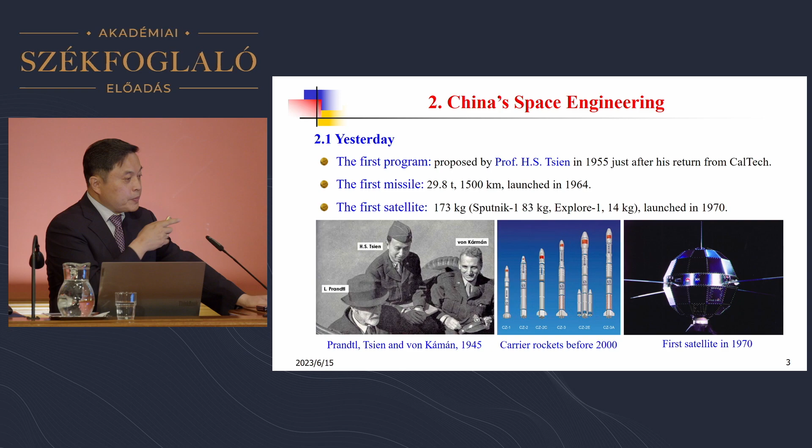By the end of World War II, Professor von Karman led a military mission to Germany to investigate the research on aeronautics and astronautics on the German side. This mission included only 5 people, including von Karman, and Professor Tsien was one of the members. This picture is very valuable—it shows Professor von Karman on the right, Professor Tsien in the middle, and on the left Professor Ludwig Prandtl, the supervisor of Professor von Karman.

They had this meeting in Göttingen just at the end of World War II. However, ten years later, Professor Tsien returned to China and proposed the first program to the State Council to develop long-range rockets and missiles. This was the very beginning of China's space engineering.

China launched its first missile in 1964. From today's standard, this was just a middle-range missile, because the maximum range was about 1,000 to 1,500 kilometers.

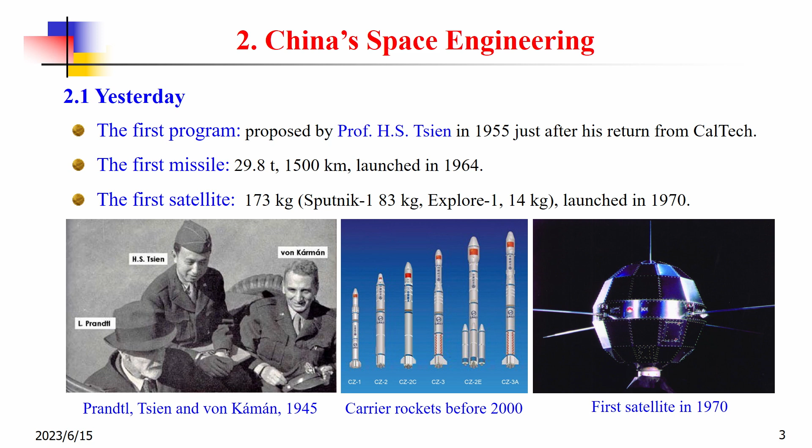Then China launched its first satellite in 1970, based upon the development of those missiles. I need to emphasize that the total weight of the first China satellite was much heavier than that of Sputnik, launched by the former Soviet Union, and Explorer 1, launched by the USA. This represents the capacity and ability of carrier rockets in the old days.

Now let me turn to today. As you know, China has established the China Space Station, and this station accommodates 6 astronauts in total. Very recently, last month, crew number 15 completed their mission and returned to Beijing, and crew 16 began to work.

In the past few years, China has completed several lunar explorations. The most important was CE4, completed in 2019. It landed on the far side of the moon, and the next mission sampled about 1.7 kilograms of lunar soil and returned it to Earth. These are very important missions in the new century.

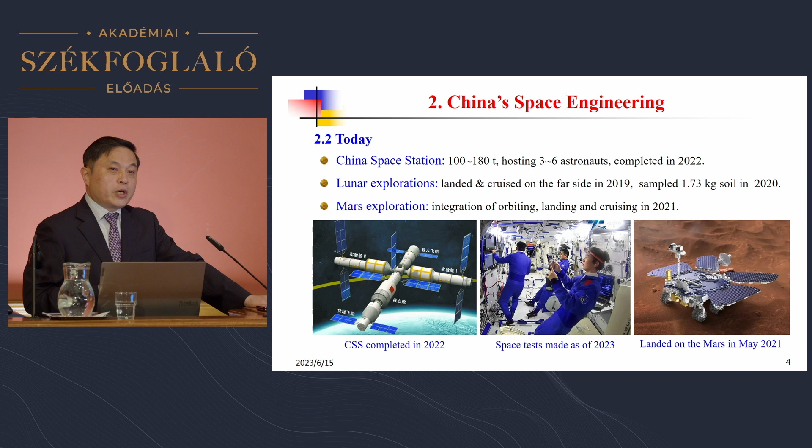In addition, China completed its first Mars exploration 2 years ago. This mission is very complicated because it integrates orbiting, landing, and cruising on the surface together. This was also China's first mission to Mars, so you can imagine China did not have a lot of information about the Mars surface. We needed to detect the surface of Mars and decide the best location for landing.

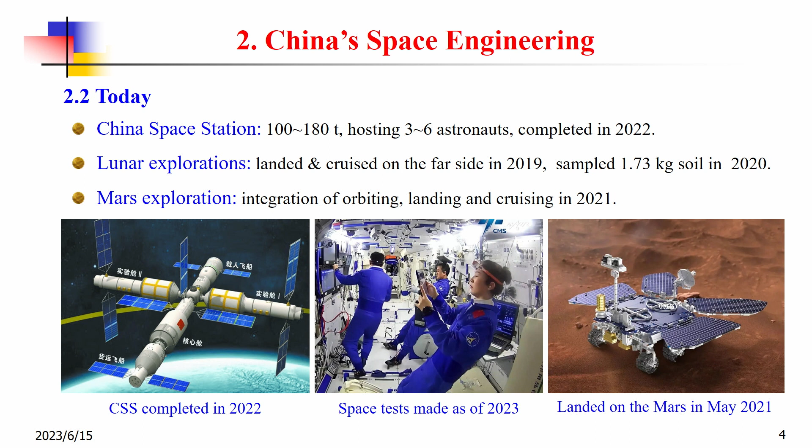Now I'm going to select 2 examples to detail some technologies. Let me talk about CE4. CE4 means the 4th mission of the Chang'e program. Chang'e is the name of a beautiful lady in Chinese myths.

That's a legend. It's said that this lady swallowed the magic medicine of her husband, and then she flew to the moon automatically. She didn't know how to do it and could not come back. Anyway, she lived on the moon, so China used the name Chang'e to call the lunar exploration.

CE4 is the 4th mission to let the orbiter and the landing platform go to the far side of the moon. What does far side mean? Perhaps you know the spinning rotation and the rotation of the moon around the Earth are the same, so we can never see the other side of the moon.

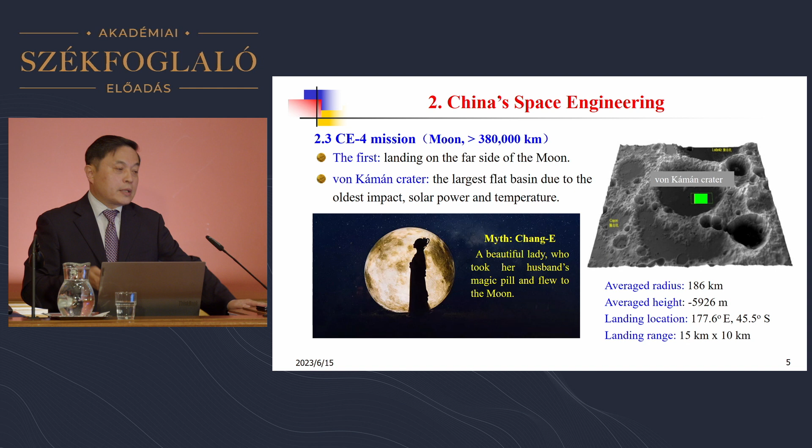So you can imagine the difficulty here: how we can communicate and control a satellite and then send the landing platform to the far side of the moon, because it's not possible for us to see it directly, and not possible for us to communicate and control it directly.

The other issue a lot of people ask me is why the landing platform finally chose Von Karman's crater. Crater here is a very specific term, meaning a basin due to impact. Let me talk about this story later.

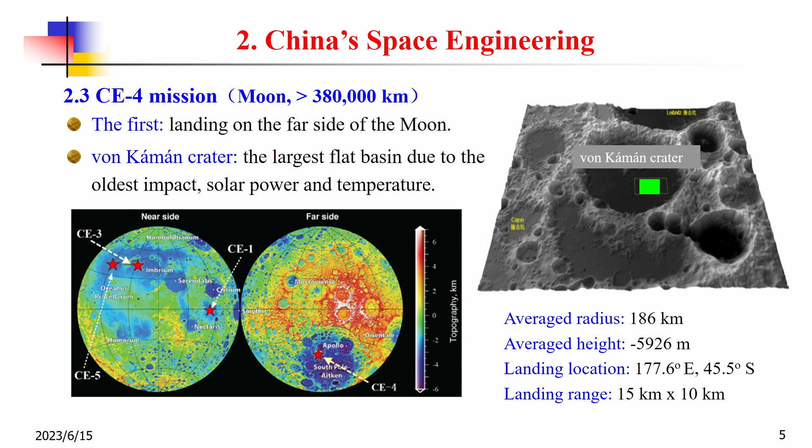This picture shows you several locations: CE1, CE4, and CE5, etc. The CE4 location is in the right picture. This means the far side of the moon, and the blue region in the bottom part means the South Pole region, called Aitken.

This is due to the impact of some asteroid, a small planet. Astronomy scientists told me that this is the oldest impact in the solar system.

Here today, some people are more familiar with these stories. Anyway, this is a very important location from a scientific value standpoint, because if we can collect some soils or rocks later on, we can judge or identify the source of the solar system.

So China selected Von Karman crater simply because it is the oldest and most flat basin on the far side. Meanwhile, it can offer enough solar sunshine to guarantee our solar power systems and keep proper temperatures for the landing system and rover.

The right picture shows you the exact location of the landing position. The green square in the picture is 15 kilometers wide and 10 kilometers high. We needed to control the landing platform to fall within this very exact rectangle.

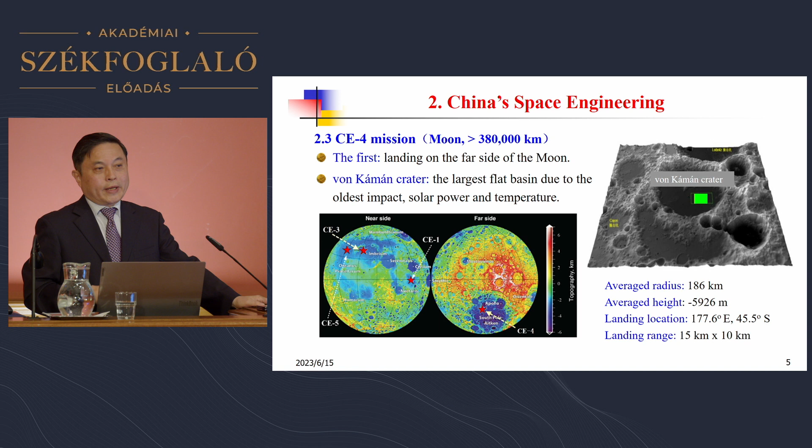This is a very tough problem because we cannot communicate with either the orbiter, the platform, or the rover. So the simple idea to complete communication and control is to launch a relay satellite to the far side of the moon, just like the picture shows.

Actually, we launched a relay satellite to the so-called halo orbit around the second Lagrange point, along the connection between the moon and the Earth. More than several hundred years ago, the French mathematician Lagrange found 3 points along a line passing through the Earth and the moon.

Here is the second Lagrange point; the other points are here and there. We can use this point because around it, the centrifugal force of your spacecraft and the summation of all gravitational forces are balanced. So usually we say it's quite clear in those regions.

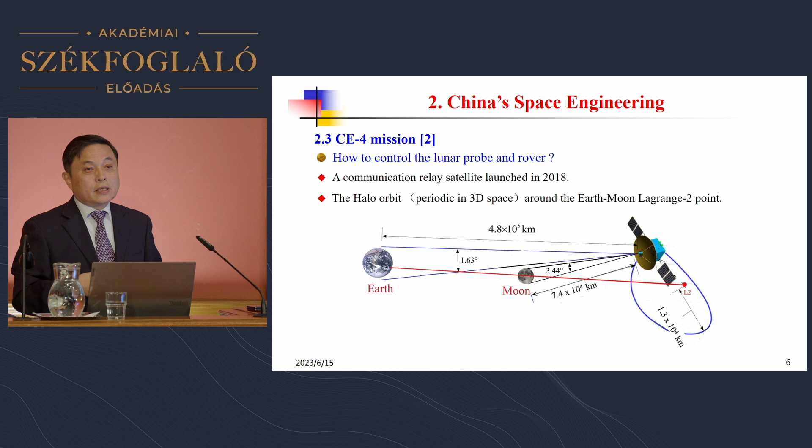In humankind's history, this was the first time for us to send a relay satellite so far, together with a very large antenna. Because if the size of your antenna is small, then the signal you can receive and transmit is too weak, and that would be useless.

So the most important issue for this mission is to design and manufacture a very large antenna in a very exact configuration. The final antenna the Chinese engineers designed has 4.2 meters in diameter. In addition, it needs to transmit X-band signals, about 8 to 12 gigahertz, so the wavelength is very short.

However, the configuration of your antenna reflector must be even smaller than the wavelength. So the basic requirement is that the mean square value should be less than 1 millimeter, which is about 0.83 millimeter. If you make a simple calculation, you can see that D divided by E is about 5,000. This is a very strict requirement for the design of a space antenna.

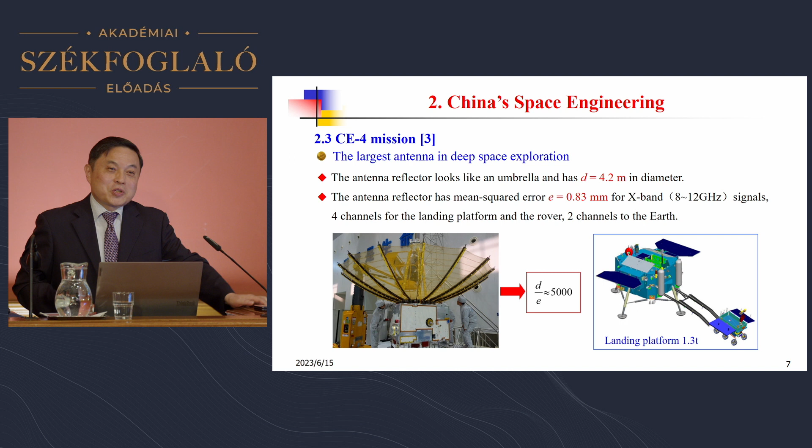Anyway, we did it. The left picture shows you the antenna in the final ground test, and I was involved in a lot of evaluations for this antenna. We need to guarantee that the exact shape we measured on the ground, with the impact of gravity, cannot influence the real shape when it is centered near the moon's orbit. This includes a lot of mechanical problems, mechanics, in particular dynamics.

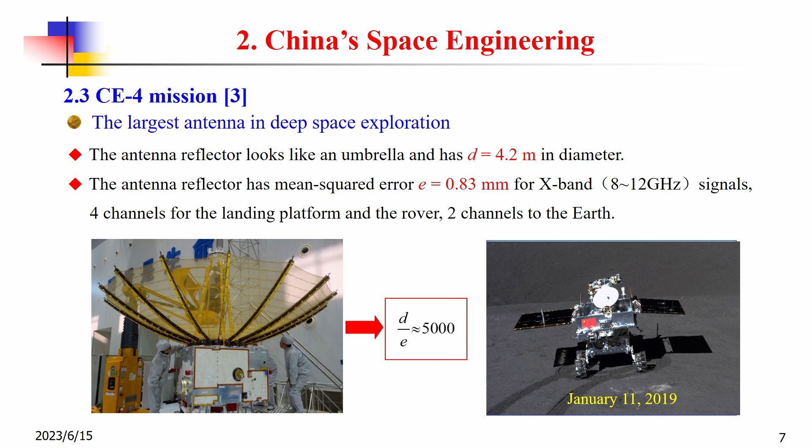And the right picture shows you the landing platform together with the rover. And finally, on January 11, 2019, we succeeded. This picture shows you the rover landed on the far side of the moon. Okay, this is the first example.

The second example I'm going to talk about is the TW1 mission to Mars. This is China's first mission to Mars. As I just mentioned, we tried to integrate orbiting, landing, and cruising together in a single mission. This is very challenging. In China, we use Tianwen to name all the exploration programs to Mars.

Tianwen is the name of an ancient poem or poetry written by Qu Yuan. This poetry is about exploring universal laws or rules. Of course, that was about 2,000 years ago, and a lot of things were imaginary. However, today, a lot of things have been realized. Anyway, TW means the name of the Mars project in China, and TW1 is the first mission.

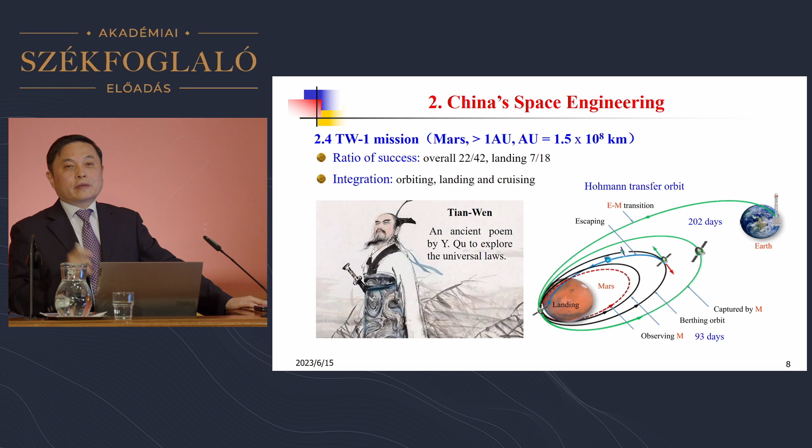As you know, Mars is much farther compared with the moon. We use AU to represent the distance between the sun and the Earth, and the distance between Mars and the Earth is beyond 1 AU.

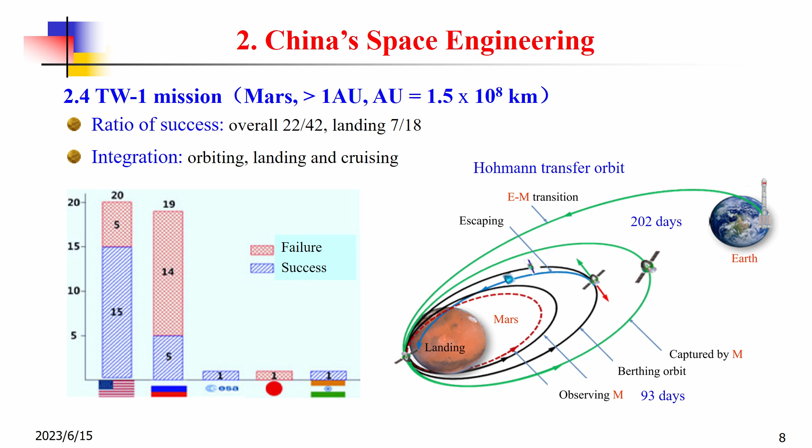So, among the history of humankind exploring deep space, the success ratio is very low, and here I can give you some figures. If you look at the overall missions, the success ratio is 22 out of 42, so about 50%. If you look at successful landings, only 7 times were successful compared with 18 attempted missions. By the way, all the successful landings were completed by NASA, based upon a lot of previous detections, including Mars information, Mars atmosphere, Mars gravity, etc.

Based upon this information, you can design your orbiter, your landing system, and your rover. However, for China, we did not have enough information, so you can imagine it's very hard for us to design the whole mission integrated with so many tasks.

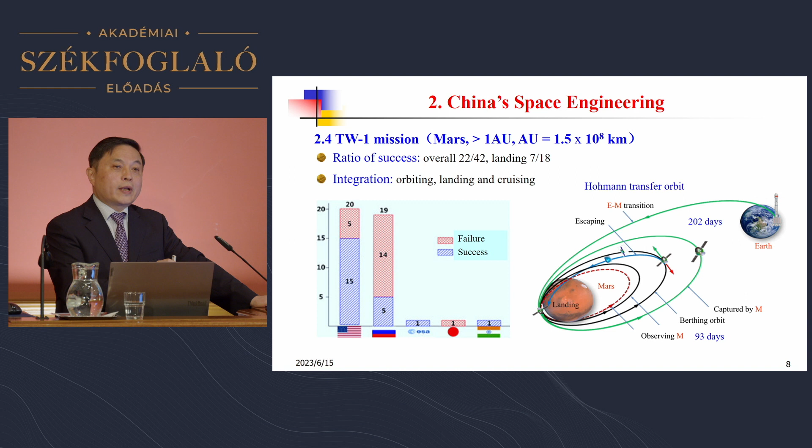The right picture shows you the whole mission of TW1. The probe was launched from the Earth and spent more than 200 days traveling from Earth orbit to Mars orbit. Then it spent 93 days observing Mars in detail, to select the proper location for landing, and to detect, for example, the density of the Mars atmosphere, then to determine a lot of landing parameters.

In this mission, the most tough problem is also related to mechanics, in particular dynamics. It's called EDL, the abbreviation of entry, descent, and landing. The question is how to drop off your capsule at Mach 8, very high speed, then how to utilize the Mars atmosphere to open your parachute at about Mach 2, also very high speed, and how to reduce the landing platform from Mach 2 down to a much lower speed, for example 3.6 meters per second.

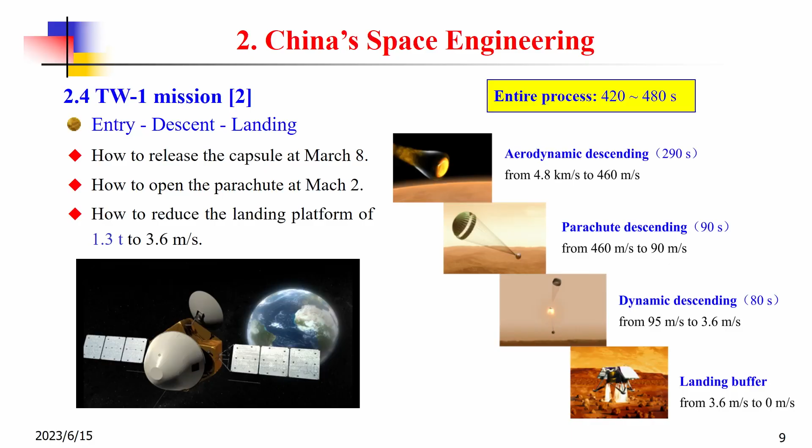We use 4 steps to complete this EDL process. At first, we spent about 300 seconds using aerodynamics to reduce the speed. Then we open the parachute, using 90 seconds to reduce the speed further. Then we start the engine to produce propulsion, and finally land on Mars.

To understand the EDL process, let me show you the detailed structure of the landing system. The landing probe is mounted on the orbiter, and the orbiter will drop off the landing platform, which includes the capsule to protect against the high temperature. Within that, we have the rover for detection and the platform together, and last, we have the bottom cover to conceal and compact all these things into the capsule.

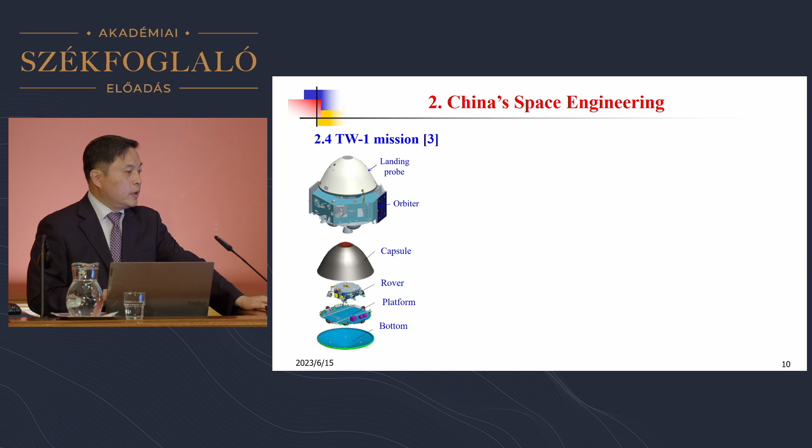Now let me show you some videos to demonstrate the whole process. The first step is to drop off your capsule or the landing probe. After it enters the atmosphere, you can see the effect of the interaction between the capsule and the rarefied gas. This is the first step.

Then we open the parachute at about Mach 2 and then drop off the bottom cover, letting the speed go down rapidly.

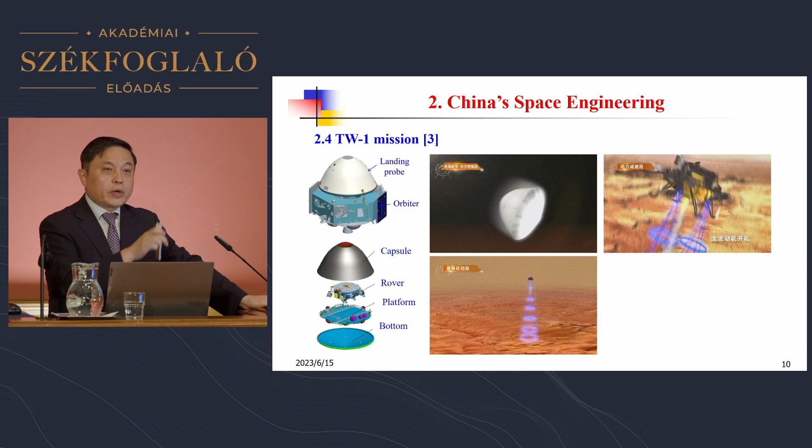Then in the third step, when the probe was at a height of about 100 meters, we open the laser detector to monitor the 3D surface or the Mars surface, then select the best location point. It will maneuver and move horizontally, not very large, about 200 meters in circle.

Finally, when the probe gets the proper information for landing, it will open the landing engine again and finally land on Mars. Okay, what is the mechanics?

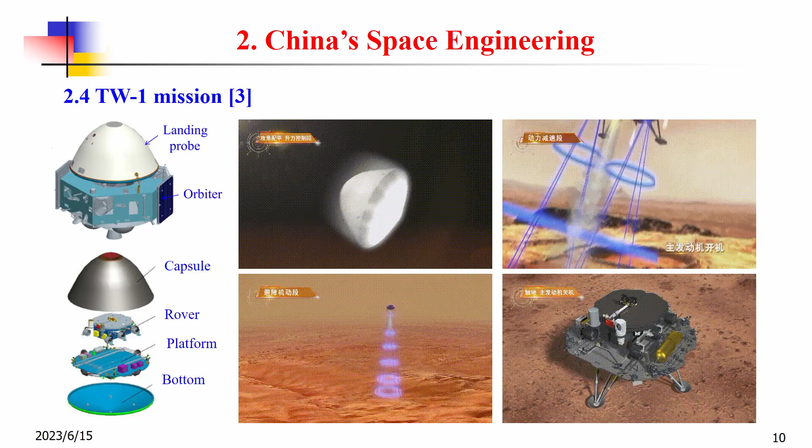I'm going to give you two examples, using two slides to demonstrate the importance of mechanics. The first thing is how to design the capsule.

We can get some information from previous Mars exploration, however, the shapes or configurations were not satisfactory. So we made a lot of CFD computation. For example, for rarefied gas dynamics over 30 kilometers above the Mars surface, we need to use direct Monte Carlo simulation for the transition flow, and then use a Navier-Stokes solver for the continuous flow. We found that the previous shape or configuration of the capsule was not good enough.

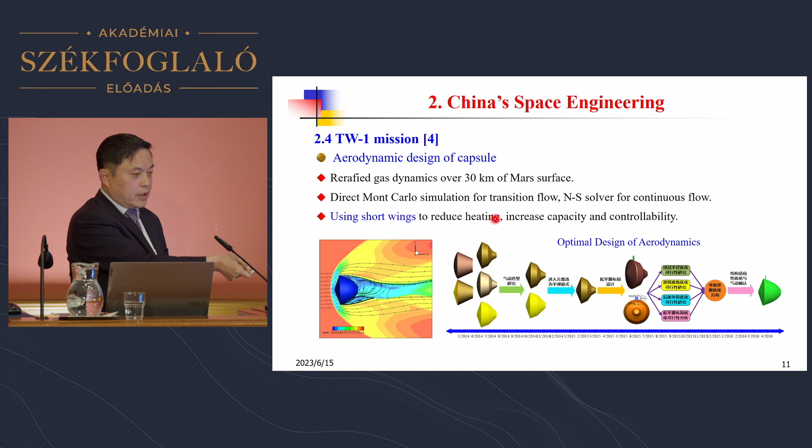We cannot reduce the speed properly, so Chinese engineers decided to use short wings to reduce heating, increase the volume of the capsule, and increase controllability. After a lot of iterations of optimal design, the final capsule configuration looks like the green one in the foremost right.

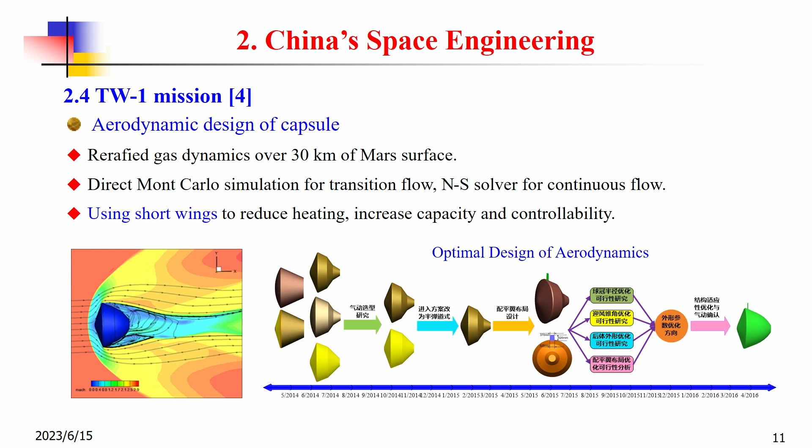Okay, this is the solid mechanics together with fluid mechanics. Then I will talk about the other problem, parachute dynamics.

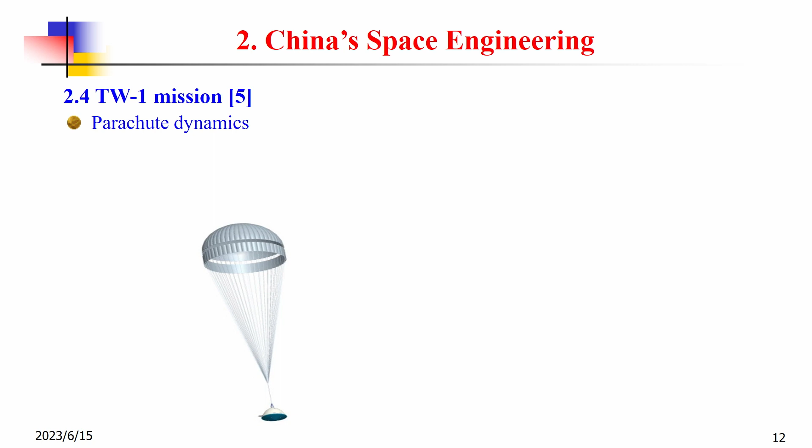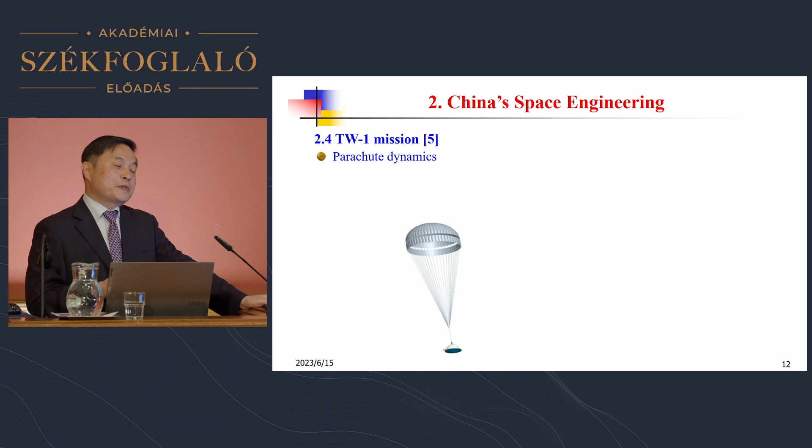Since Mars has atmosphere, it's quite natural for us to utilize the atmosphere to reduce the speed of the probe by means of the parachute. However, we have never experienced opening a parachute at Mach 2, also at very low gas density, because the density of Mars atmosphere is only about 1% compared with Earth's atmosphere.

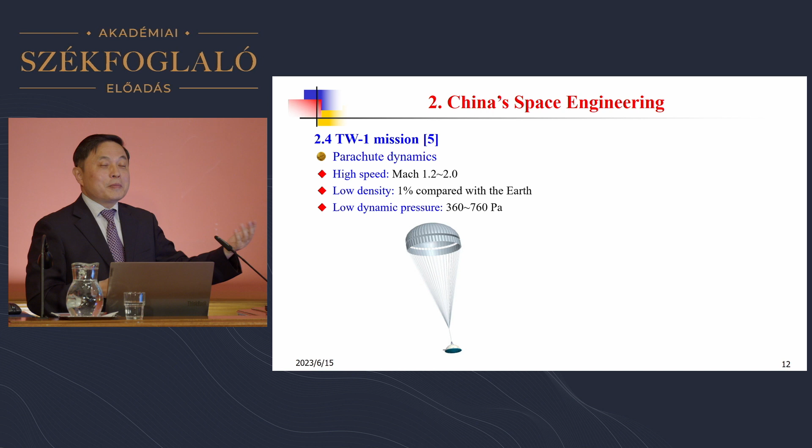So, of course, we did a lot of numerical simulations, and we found that the dynamic pressure is really very low, only around 360 Pa, compared with a similar process on the Earth.

Here is an example of numerical simulation, and you can see the two shock waves. The top one is near the parachute, and the bottom one is near the probe. Of course, no one believed the result because it was just a try.

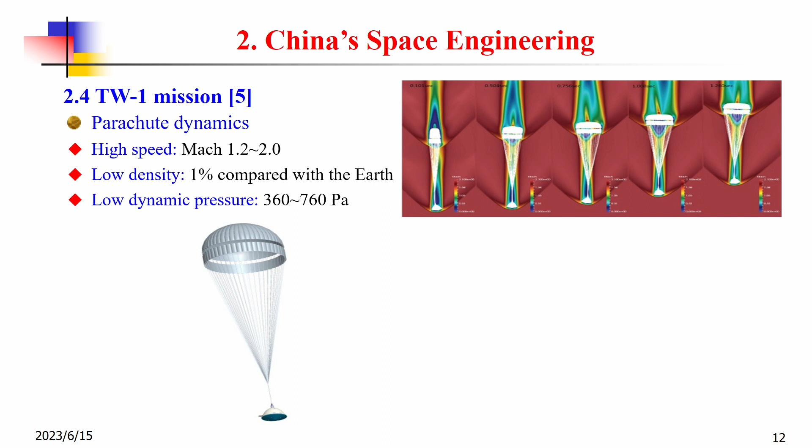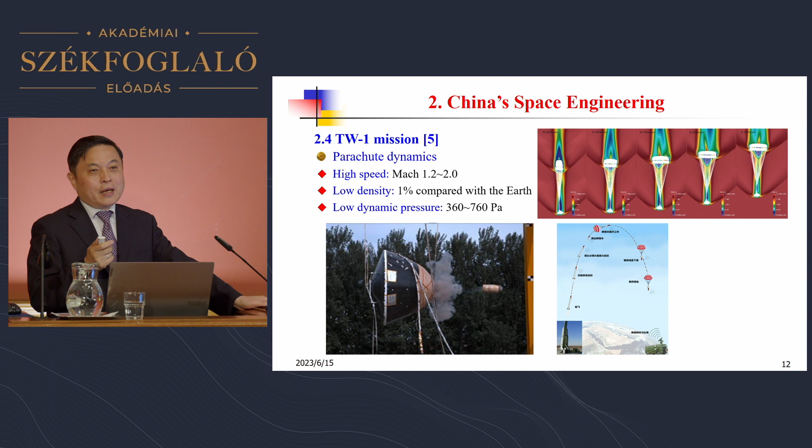So we needed to do some ground tests to verify the correctness and efficacy of the numerical simulation. Finally, we did 6 ground tests, very expensive ones, including the opening of the parachute shown in the left picture, and launching the parachute to very high sky at different speeds, approximating the real case in the Mars mission. Finally, we confirmed that the numerical simulation was okay, and then we could complete our Mars mission.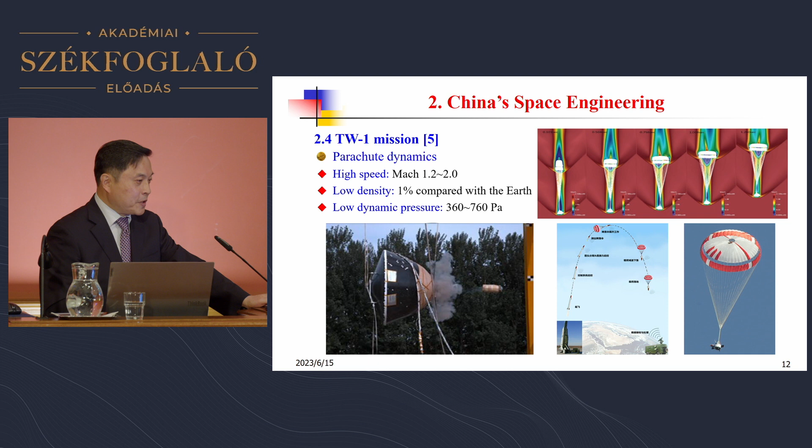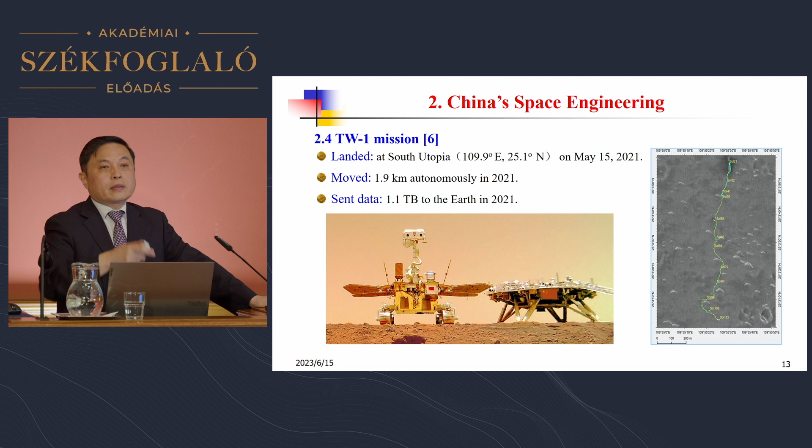We are lucky that about 2 years ago, on May 15th, 2021, the first Mars mission of China was fully successful. Later on, the rover moved about 2 kilometers away on the Mars surface within the first year. Then the platform and the rover together sent a lot of data, about 1.1 terabytes, to Earth. The right picture shows you the trajectory, the path of the rover on Mars.

Okay, this is the end of my second part. Now let me say a few words, in more detail, talking about my research related to those missions, in particular the demands for large space structures.

Nowadays, we have increasing demand for the size of space structures. As you know, solar panels are a mature technology, called conventional large space structures. The size of a solar panel can be, say, 10 meters or even 20 meters in diameter or length. The deployable structures I'm talking about today refer to space telescopes and space antennas, because they not only have large size but also very accurate configuration. That's very tough work. Nowadays, people are interested in even larger space structures.

We have some basic concept designs about the solar power station. It will have a size over 1 kilometer and even up to 10 kilometers. Here I show you some examples.

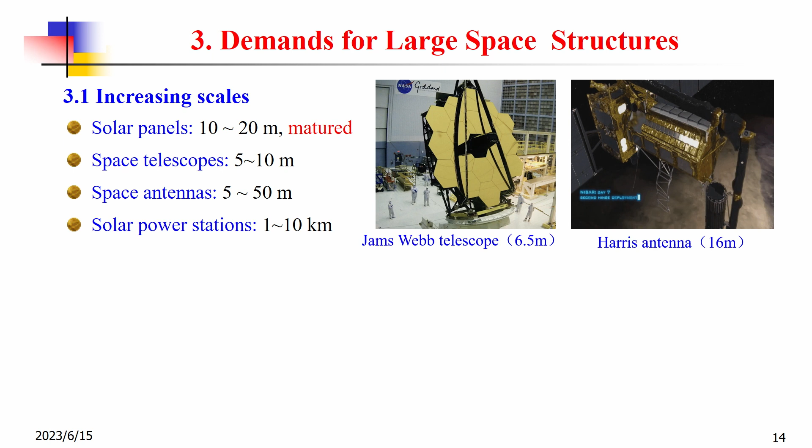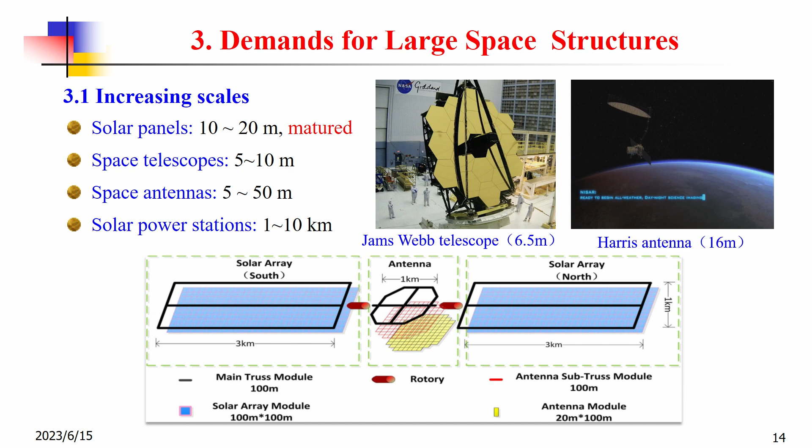This kind of antenna can be used for telecommunication and Earth observing, and also space observing. Regarding the solar power station, this picture shows the length is 7 kilometers and the width is 1 kilometer. So how do we get or construct those large space structures?

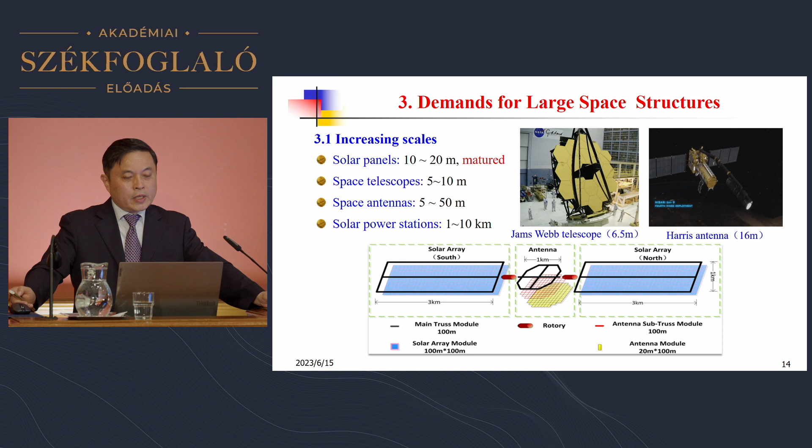This is a very challenging task for space engineers, and we need to deal with certain problems. The first is reliable deployment. The deployment process is very complicated. For example, the former Soviet Union and the United States failed multiple times, even for the deployment of a space structure less than 10 meters in size.

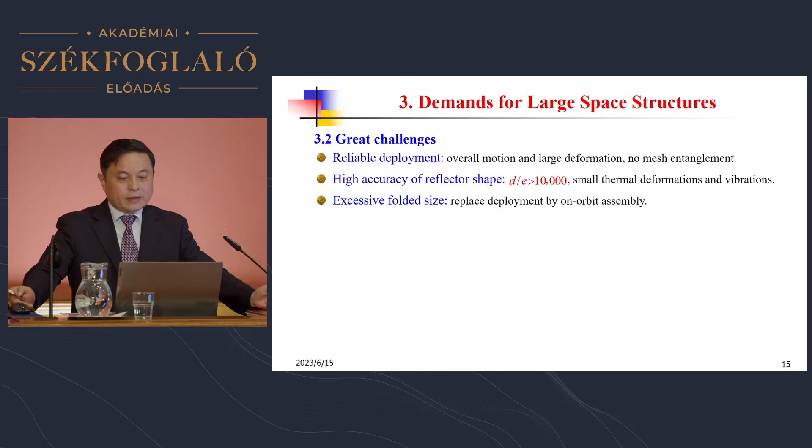This video shows the ground test at my lab in BIT. You can see that the deployment process on the ground looks quite complicated, especially for the very soft mesh reflector. This structure is the hoop truss supporting the very soft mesh reflector. We need to confirm there is no entanglement of the mesh, because in ground tests, the mesh always falls down. However, in orbit, no one knows if it will go upward, downward, leftward, or rightward. So we need to confirm the computer simulation is accurate enough for the mission in space.

If you talk about configuration accuracy, it's a more challenging problem. As I mentioned in the previous example, for the moon exploration mission, we sent a relay satellite with an antenna about 4 meters in diameter. The diameter divided by the mean square error of your reflector gives a very large number - the larger, the more difficult. However, for these antennas, usually this ratio will be beyond 10,000, even more difficult than the relay satellite in the lunar mission.

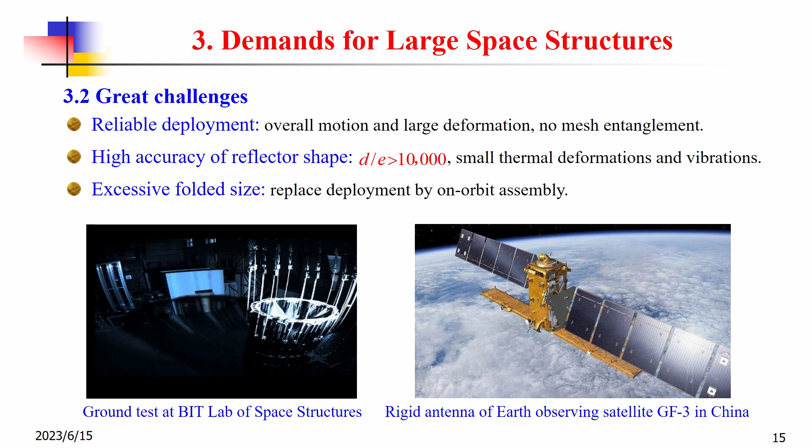For example, the right picture shows an Earth observing satellite made in China, launched about 10 years ago. To guarantee the accuracy of the antenna configuration, at that time Chinese engineers used a relatively rigid panel reflector shown in yellow at the bottom. However, if you are going to use a mesh reflector, it's very tough work to keep a proper configuration and exact shape. In particular, when your satellite goes into the illumination region and out from the shadow of the sunlight, we get thermal deformation and thermal vibration.

Now let me talk about some techniques in a little more detail. You have seen the deployment process of those large space structures. It includes the overall motion together with the elastic deformation, so we need to deal with this problem. The specific term should be flexible multi-body system, an important field in dynamics.

If your deformation is very small, then you can use so-called modal coordinates to replace the physical coordinates. This way you can greatly reduce the dimension of your system. However, this only works in the case when the deformation is small. In addition, your rotation speed could not be very large.

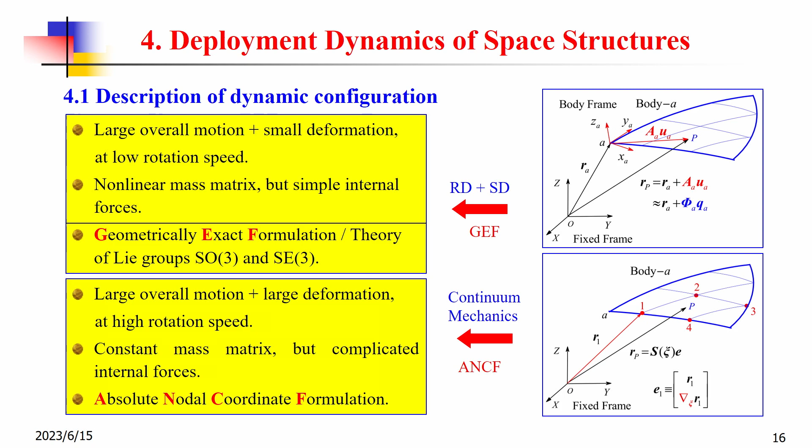The second approach is to give up the body frame. For example, we simply use a fixed frame here, also called an absolute frame. Based on this frame, we can simply interpolate the dynamic configuration of point P according to, for example, nodal points information 1, 2, 3, 4. However, we need to use both position vector and slope information of the vector.

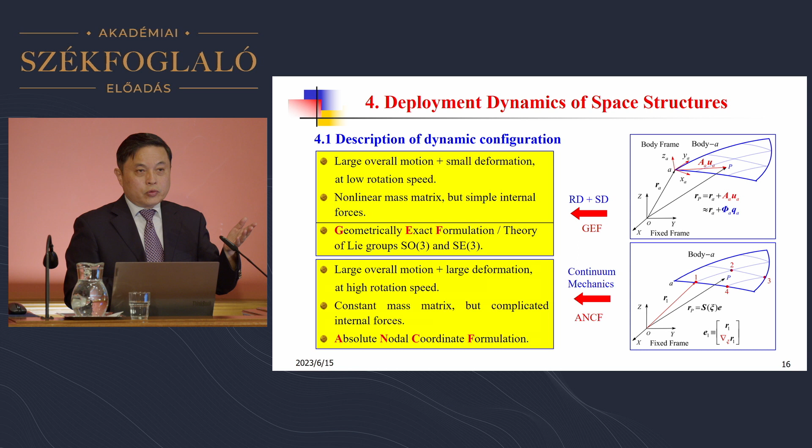This kind of approach was first proposed by Professor Shabana at the University of Illinois at Chicago, and nowadays the approach is called ANCF. Comparing the advantages and shortcomings of these two approaches, ANCF is quite universal. However, the elastic forces and internal forces have very complex formulations. Before my team's study, this kind of approach could not be used for real engineering problems. So over the past 10 years, we developed this idea to be more realistic, to deal with more real problems in engineering. For example, we proposed new finite elements based on the idea of ANCF.

They are superior to other finite elements in commercial software because commercial software cannot deal with the deployment dynamics of space structures. Here are some comparisons of our results and those offered by commercial software.

The right picture shows the large deformation of various beams with different cross sections, such as I-section, square section, or hollow rectangular section. The left picture shows the comparison of our elements with commercial results.

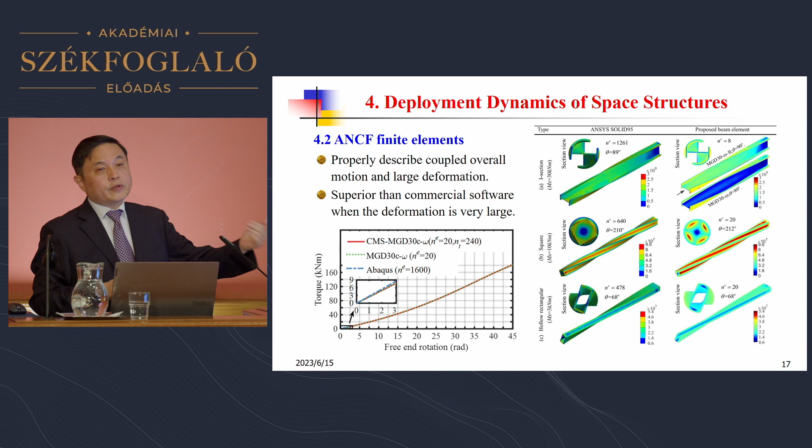Commercial software can only predict a twist like this, about half a circle. However, the elements we developed can predict a very large twist, about 10 circles. This is very important for soft deployable structures in space engineering.

Here are some other examples of finite elements. You can see the very large twist of those beams. We also have shell elements to predict very large deformation, including plastic deformation.

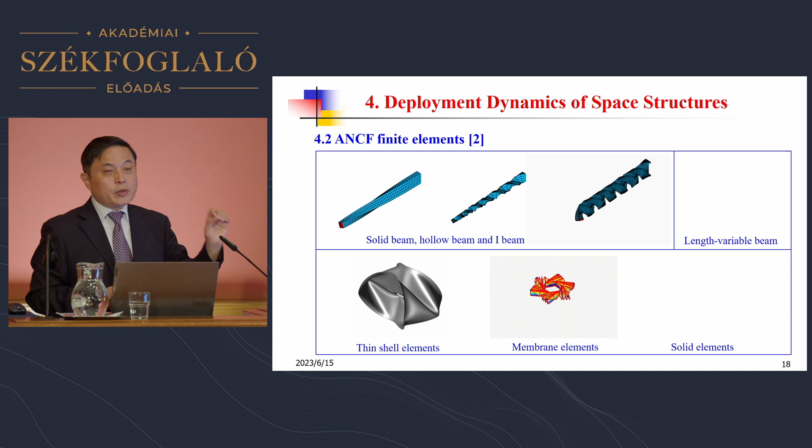We have the membrane element to simulate the spinning deployment of solar panels, and we also have the solid elements to predict the overall motion and large deformation of those structures.

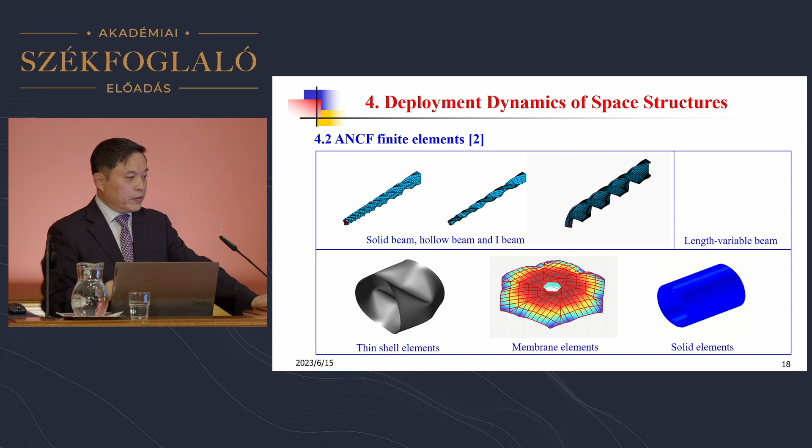In addition to those elements, based upon the so-called arbitrary Lagrange Euler description, we established a new element to describe beams with variable length. In the right videos, you can see that the length of the beam is increasing during the spinning process.

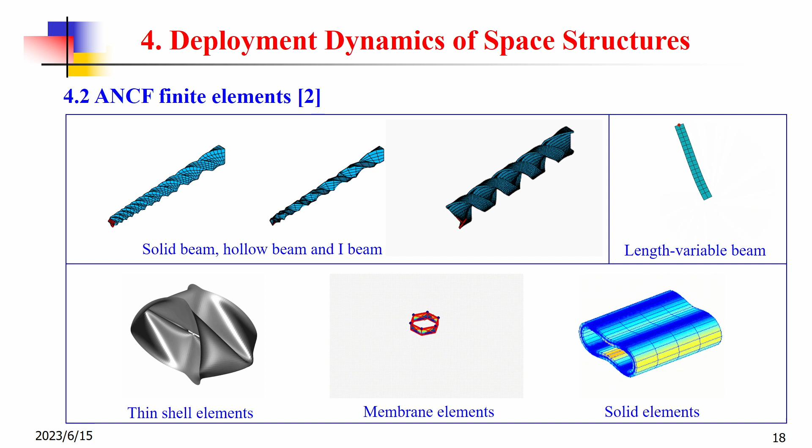After developing those new elements, we could only predict simple deployment processes without any contact of the components. So we need to solve the problem of contact between two soft bodies. First, let me talk about the contact between two beams.

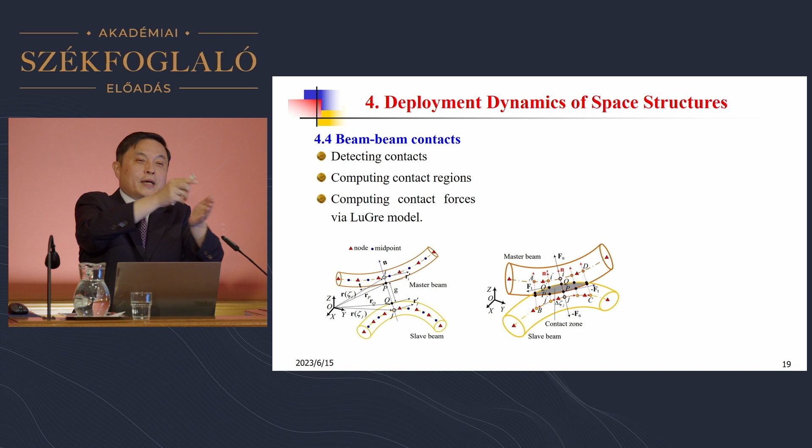It looks very simple; however, the computation is actually very complicated because we need to compute the distance between two beams to identify whether they get in contact. Then, if they do get in touch, we need to determine the contact region, shown shaded in the right picture.

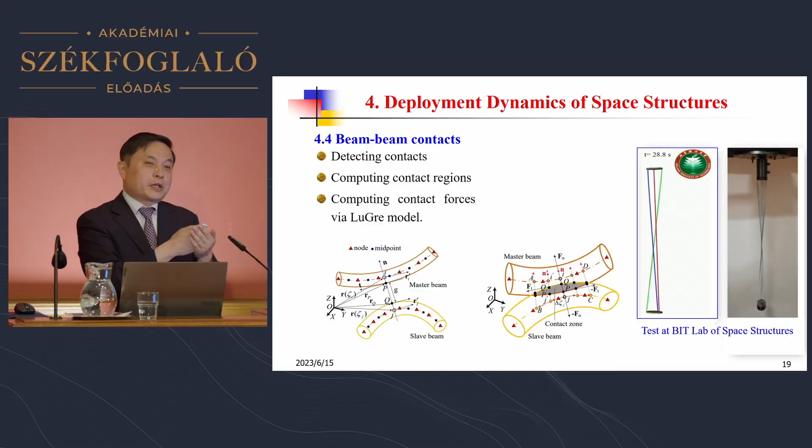Then we need to compute the normal contact force and the tangential contact force. The tangential contact force depends on friction, which is also a very tough problem in mechanical engineering.

We are lucky that the right video shows good agreement between the numerical result and the experimental result, and the time history also shows very good agreement.

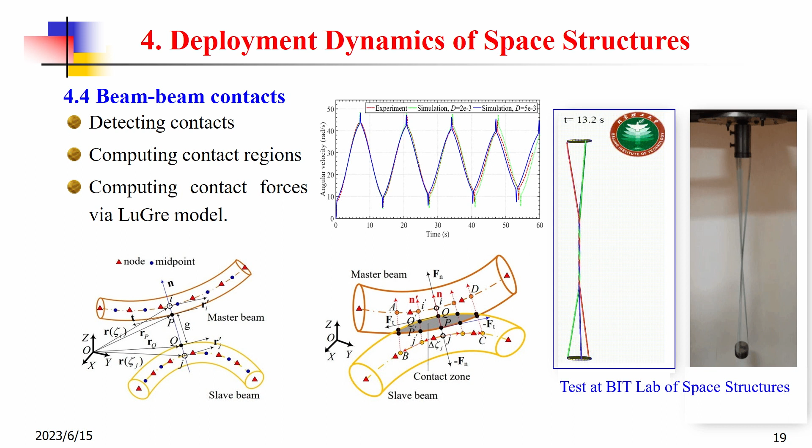Of course, the tougher problem is not the contact between two beams, but the contact between two soft surfaces or soft bodies. In this case, we cannot get an exact solution.

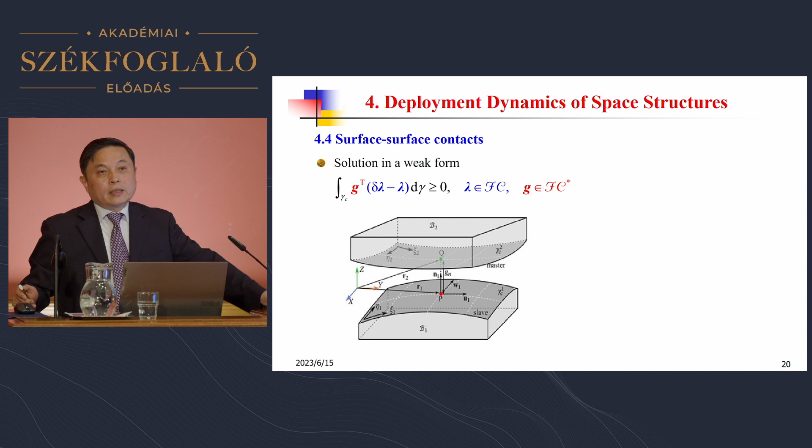Usually, we prefer a so-called weak solution in integral form, like this, where the vector lambda lies on the friction cone, and the vector g lies on the complementary friction cone.

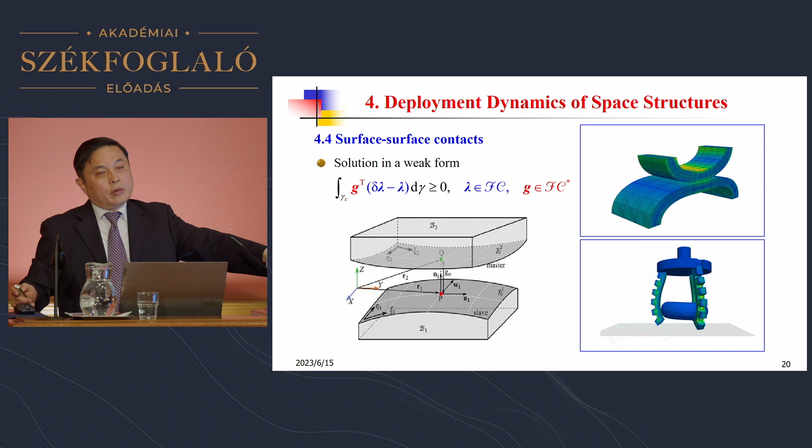Here are examples of contact between two soft bodies. This is the contact of two half-cylinder shells, and the bottom figure shows how a soft gripper can grasp a torus-shaped soft object, move it, and then release it.

Based upon those techniques, we can predict the deployment dynamics of a complicated structure, for example, a satellite antenna reflector. This video shows the process for a communication satellite.

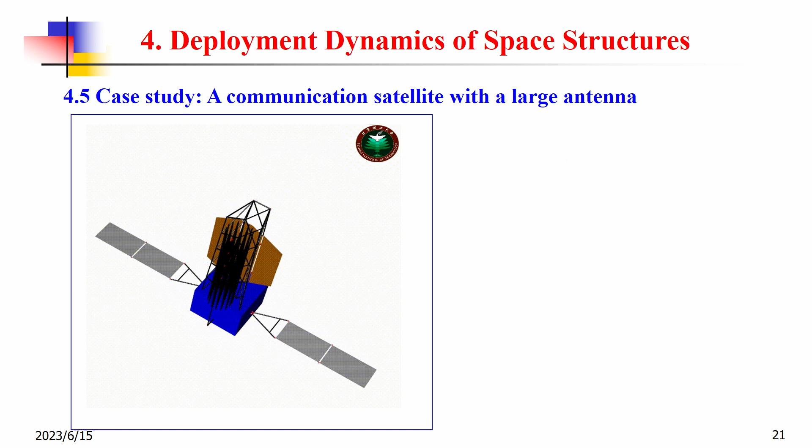First, the two solar panels deploy, then the microwave signal feed source deploys, and then a very large antenna deploys. Of course, the truss supports the soft mesh, so I give a comparison in the right videos.

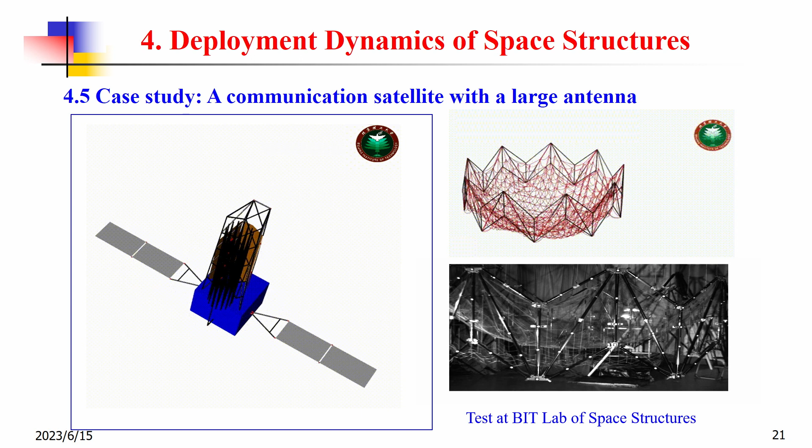The top video is the numerical simulation, and the bottom video is the ground test at my lab in BIT. This is the most important stage, because we need to identify whether there is any entanglement of the mesh. Here are the comparisons of numerical and experimental results.

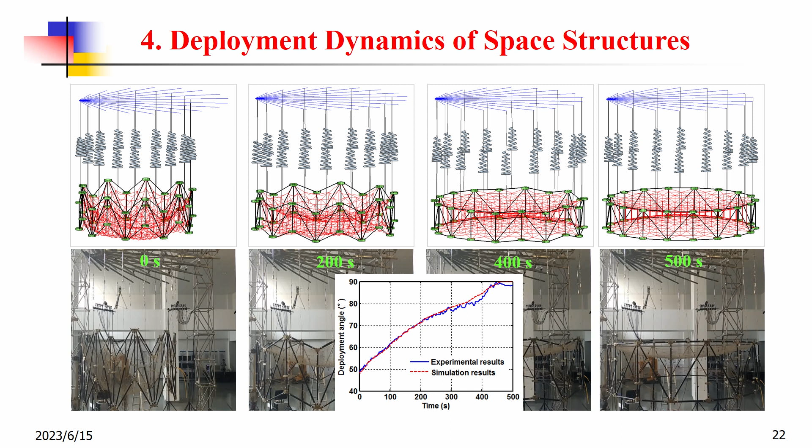From this figure, you can see that the deployment angles get very good agreement. We can even predict some stick-slip phenomena within the joints of the truss.

Actually, this kind of approach is quite universal, not only for the deployment of space structures, but also for many other techniques. Here I give a second example: a flying net which can capture a disabled satellite or space debris.

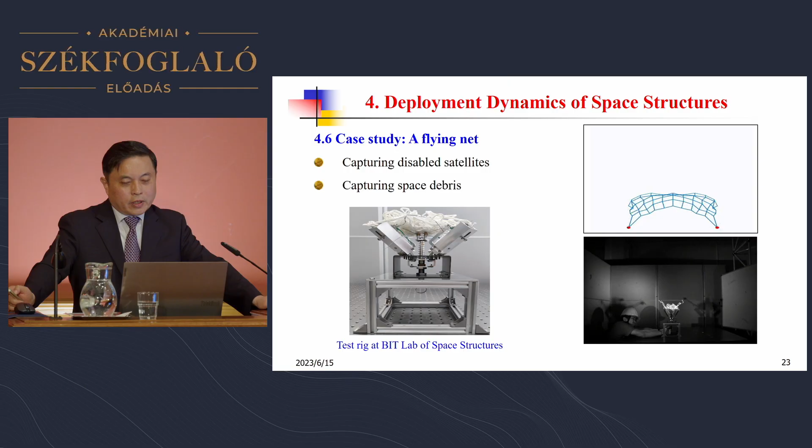Actually, the top video and bottom video should start at the same time, and then you can see that the flying net goes upward, the same configuration we observed in the experiment. Maybe different computers give different results. It doesn't matter—anyway, this is a very useful approach for many other applications.

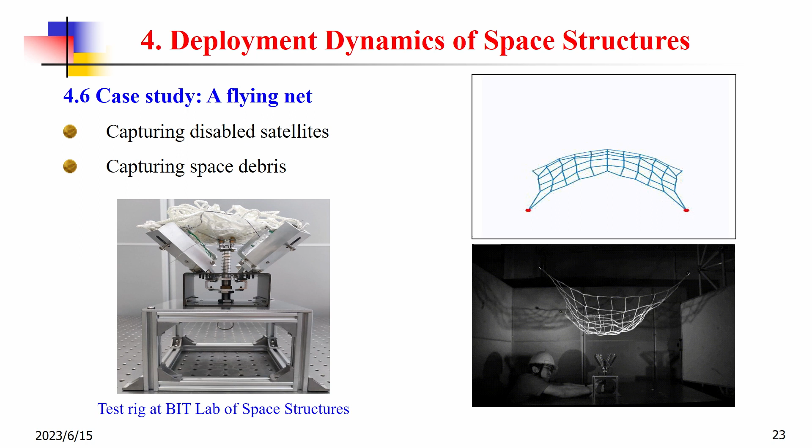Okay, this is the last part of my lecture. I'm going to talk about autonomous assembly of space structures.

With the increase in space structure size, we later found that it's not possible to deploy everything in orbit, because if your space structure is very large, even if you compact it into a small volume, you cannot put it into your carrier rocket, especially in China.

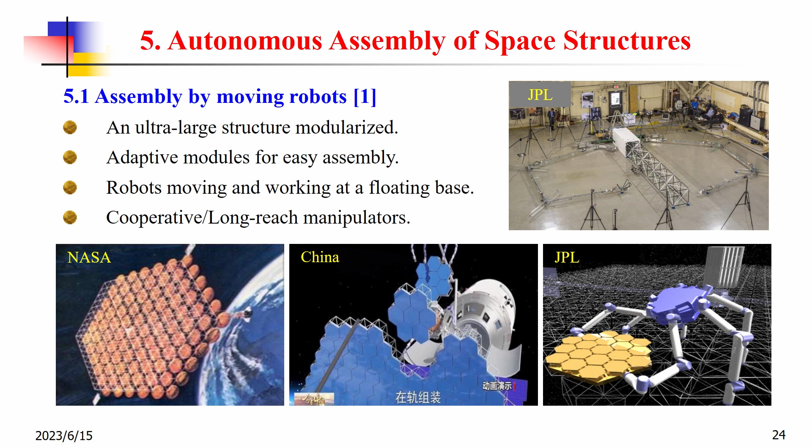The diameter of most carrier rockets should be less than 5 meters. So, for example, if you are going to construct a large antenna over 100 meters in diameter, it's not possible to put this single antenna into the rocket. This way, it's quite natural for us to construct large space structures one module at a time, so we need to design ultra-large space structures based upon modularization.

For example, your antenna should be designed like this, either in the concept of NASA or in China. Usually we use hexagon modules, a lot of hexagon modules, to compose a single large space structure. Of course, this way we need to solve a lot of new problems. In particular, all those ultra-large space structures should be constructed by robots rather than astronauts.

So basically, we are developing two kinds of approaches. One approach is based upon moving robots, and the other approach is based upon flying robots. Let me talk about these approaches.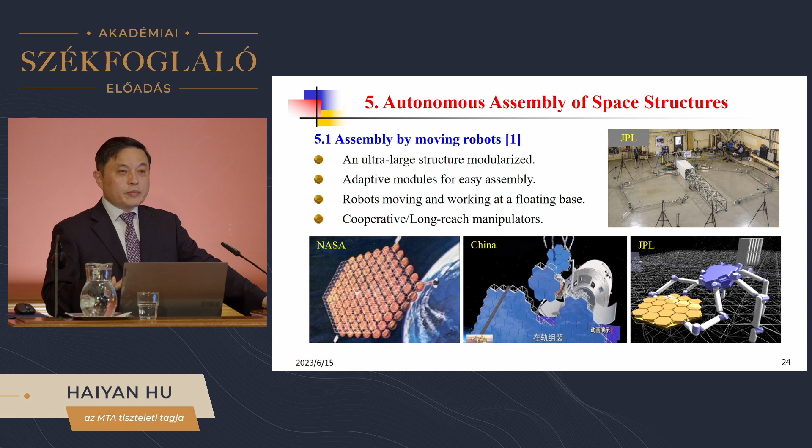Regarding the moving robots, the basic way to construct a large space structure is how to design those hexagon modules and how to assemble them together. It's quite easy to understand that if your module is designed in the same size, due to manufacturing error, you cannot fix or put the last module into the assembly. That's a very easy thing to realize.

So it's better for us to let our module size be adaptive to change, for example, due to the sunlight, due to the thermal environment, etc. By the way, your robot must move on a very flexible structure because during construction, your robot needs to move on the flat structure step by step. And this way, it's quite difficult to control a robot moving on standing on a moving basement.

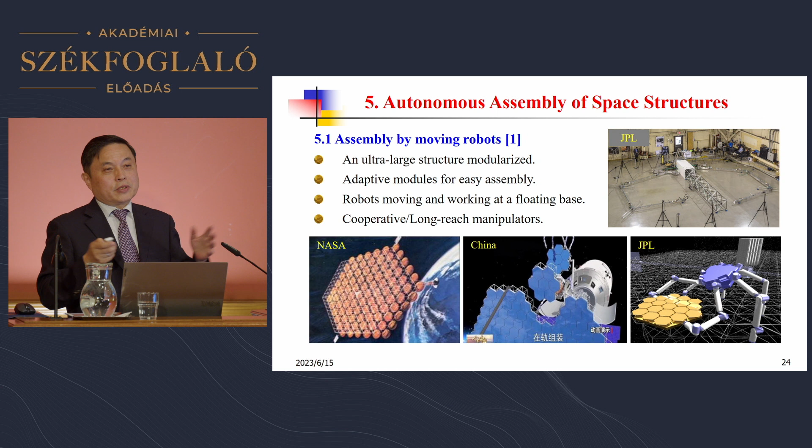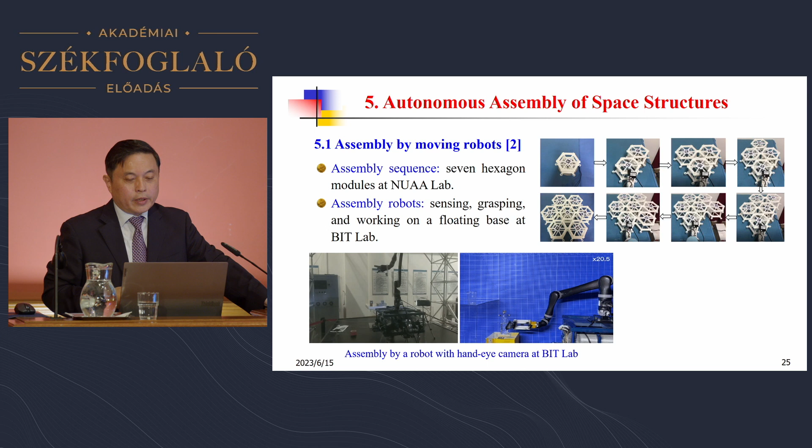These two videos show how the robot senses an object automatically, grasps it, and then fixes it somewhere. I mentioned the robot is working on a floating frame, the moving base. So according to conservation of momentum, when your arms move toward the right, your basement will move in the opposite direction. That's a problem.

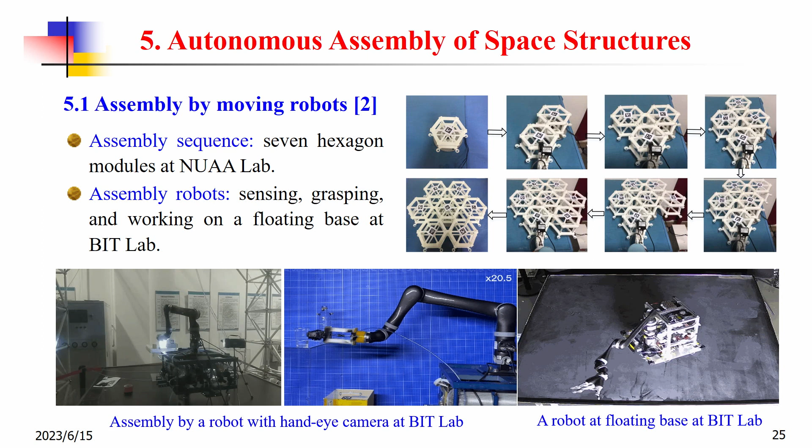This is the ongoing research of my team. Regarding the flying robot, this approach is more flexible. It can deal with even more complicated cases. However, it also has some shortcomings, including the consumption of fuel, and of course, it has more risks.

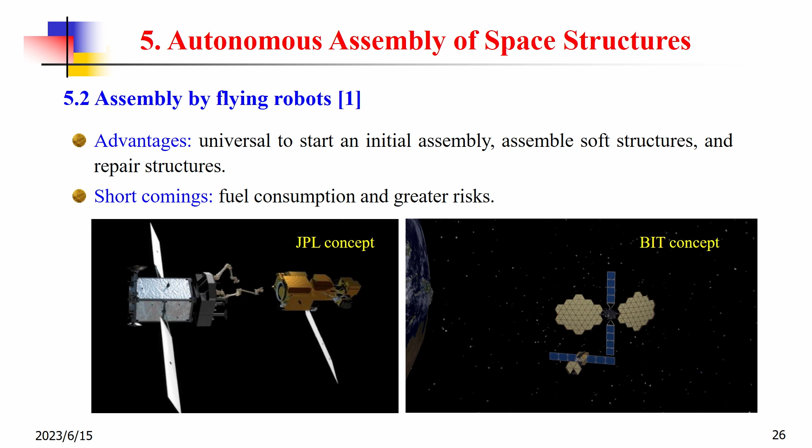Here are some basic ideas of JPL and my lab. The right figure shows that, for example, your very expensive antenna is damaged due to a small piece of space debris. Then our service spacecraft can fly, orbit your satellite, get rendezvous and dock, detach a small module, and replace it with a new one. This is the final purpose of my research, and now we are doing some fundamental studies.

Towards this objective, of course, we need to design the flying robots with the ability of obstacle avoidance, and rendezvous and dock in a very cheap way, rather than the whole expensive process like the China Space Station.

You can see one satellite moves and avoids any contact with the rest of the satellite, and then rendezvous with the third satellite. The third satellite is spinning, so they need to have the same spinning rotation and get closer and closer, and finally the two red docks get together and complete the docking process.

No matter whether your flying robot is smart, or you use even a lot of new artificial intelligence technology, it's still the most dangerous process for your final docking, because both spacecraft are flying at very high speed, about 8 kilometers per second. You need to control the relative distance and relative velocity to a very low range, for example, 0.1 meter per second.

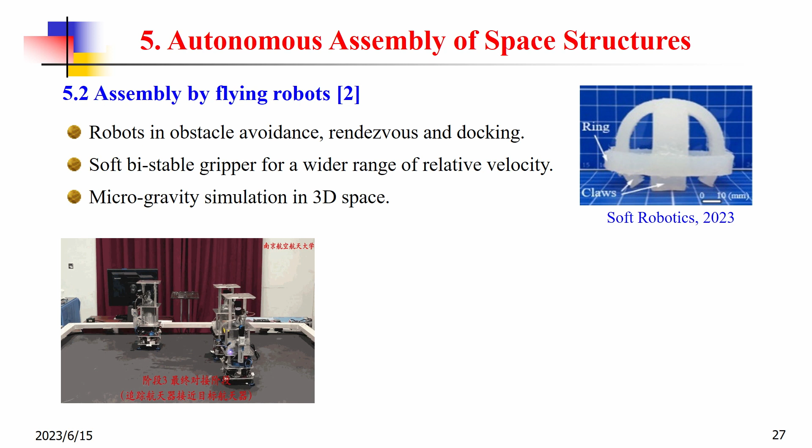That's too difficult, so the better way is to design some new gripper to adapt to the variation of relative velocity. My team member designed a bistable gripper. This picture shows the configuration. At the bottom side, you can see two soft beams crossed together, and this is one stable equilibrium position. If the top of the gripper touches anything, it will suddenly change shape to the other stable configuration, and the claws will grasp the object firmly.

Let me show you the video. The video does not start from the very beginning. The yellow block, a cube satellite, moves toward the right side and then suddenly hits the gripper. The gripper changes configuration and firmly grasps it, completing the docking process.

The video does not work.

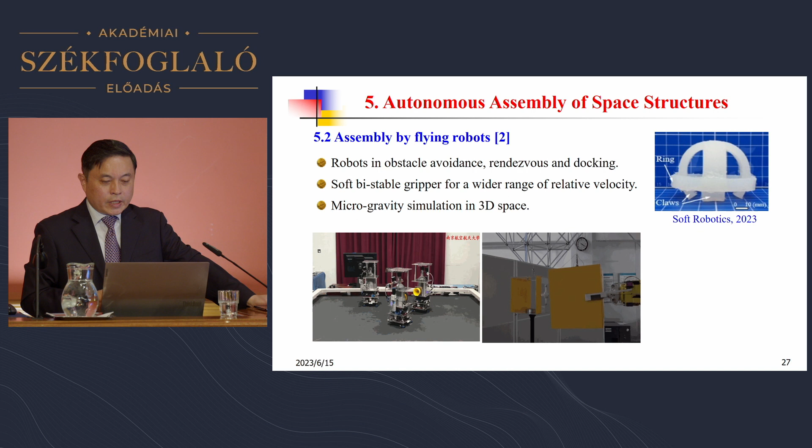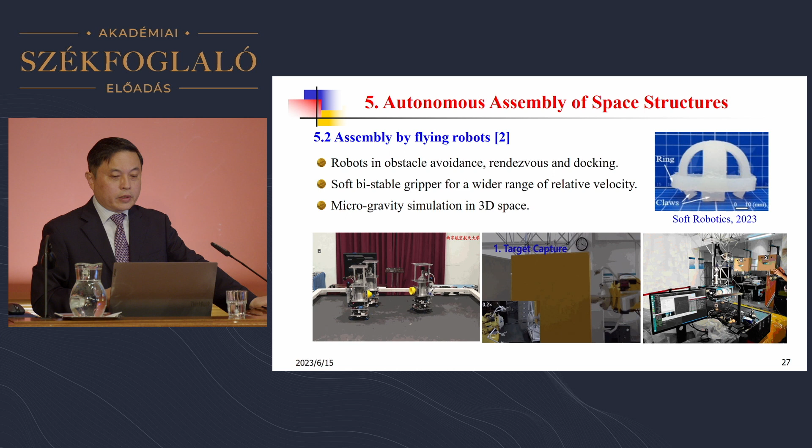Most of the ground tests nowadays are based upon two-dimensional ground testing, supported by, say, air suspension. However, the real assembly process should be completed in three-dimensional space. So we also pay much attention to simulating three-dimensional space with microgravity. The right picture shows you the ongoing work of my team.

Now let me say a few words to conclude my lecture. First of all, the past 70 years have witnessed the success of China's space engineering, proposed and initiated by Professor Qian Xuesen and developed by several generations of young talents. Of course, the influence of Professor von Karman is very important during this process.

The second point is that large deployable structures have well served China's space missions, but nowadays we need even larger space structures, or ultra-large space structures. This kind of structure is still in ongoing research. And finally, nonlinear dynamics and control play an essential role in advanced techniques for all kinds of large structures. So I hope young people will be involved in this process.

Thank you so much for your attention.

Professor Hu, we were all most impressed. I was especially impressed by the scale of the structures you dealt with, and also by the amount of smartness you built into them.